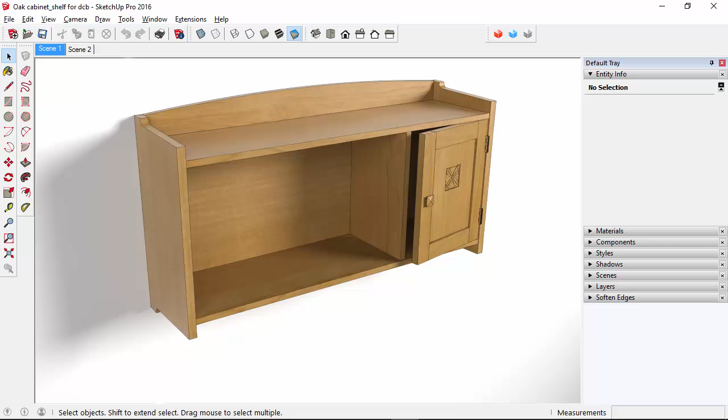There are a couple of ways to do this. I'll show the method I showed him. I think it is the easiest, and it helps you keep everything straight. For this video, I'm going to demonstrate this process using the door on this wall cabinet / shelf. Although I did originally draw the rails, stiles, and panel as separate components, I converted it to a single component for this example. I'll convert it back into the 5 separate parts. Then in the next video, I'll add the joinery to the parts.

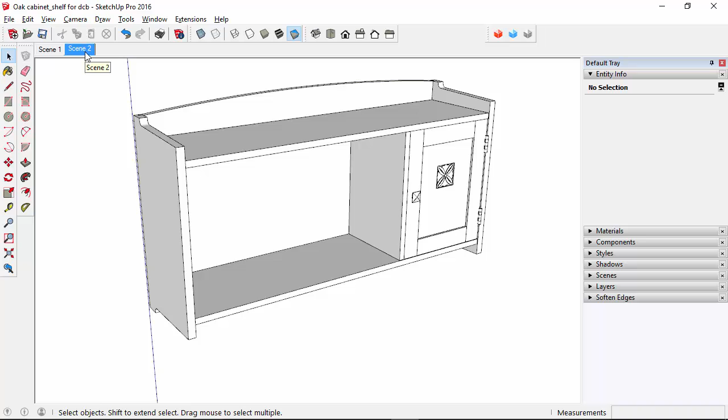Before I start editing the door, I'm going to take a moment to make a change in the model info. Under components, I'm going to tick the box for hiding the rest of the model. I don't normally work this way, but for this particular application I'll turn that on. That's a scene-specific setting, by the way, so if you wanted that to remain active after you change scenes, you would need to update the scene when you've made that change.

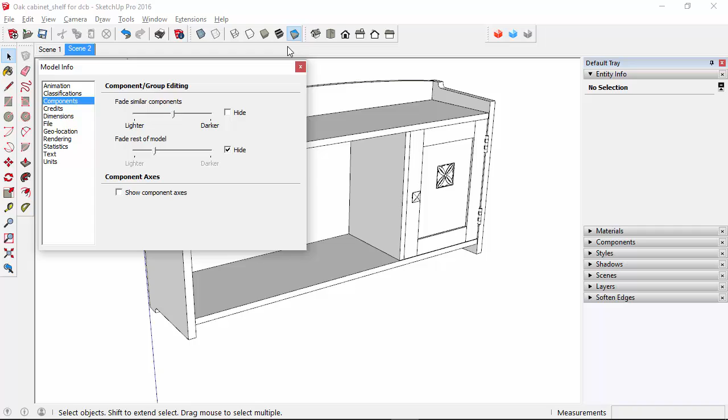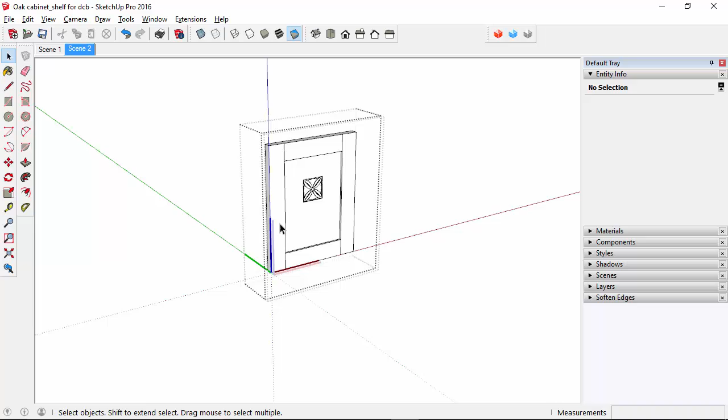Alright, so I'm going to open the door for editing. The door currently consists of the door component and the knob, which I did leave separate. So I'm going to open the door for editing, and now it's time to move on with creating these separate components. I did draw in lines to identify the ends of the rails, show that separation. If you were going to leave the door as a single component instead of its 5 separate parts, adding those lines is helpful if you apply materials, because you can get the materials to orient correctly then in just the areas where you want them.

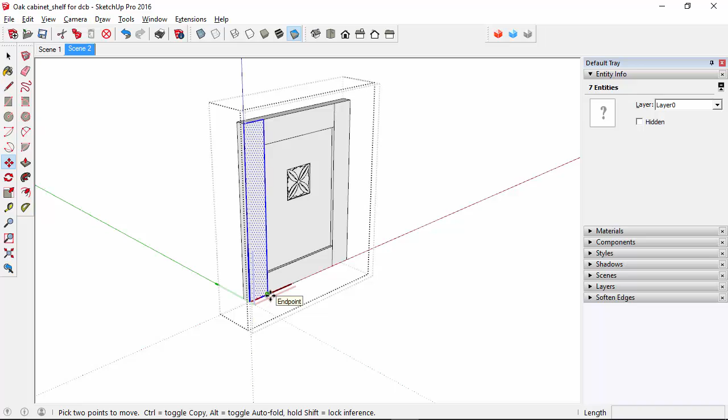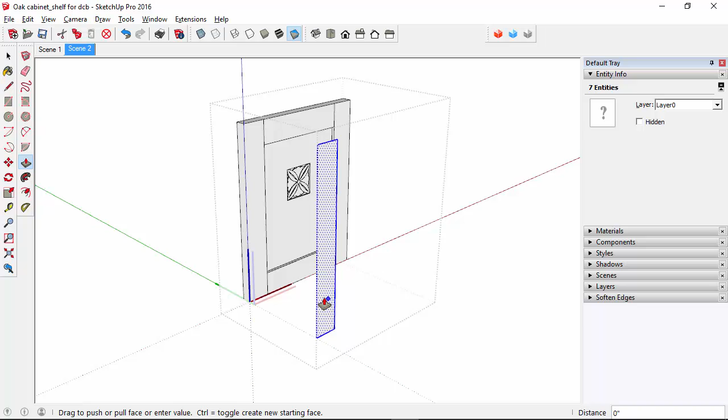And for no particular reason, I'm going to just start with this left-hand stile, and I've selected it by double-clicking on it, and then I'm going to copy that out in front using the Move tool, and we'll go about 6 inches. That distance isn't critical, but it's something that I can remember long enough to get this all done. Now I'll use push-pull and give this some thickness.

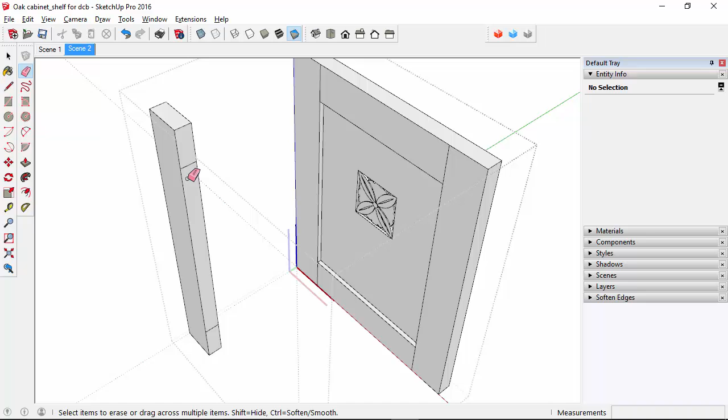One thing to note, the intersections between the edges of the rails and the edge of the stile break that vertical line, and so you get little horizontal lines there when you extrude that to make it 3D. So we'll just get rid of those because we won't want those later. And then triple click and hit G to make a component, and then we'll create the stile component.

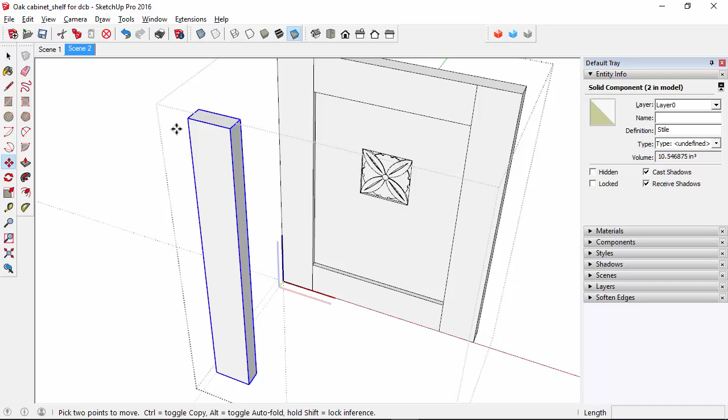And I'm going to go ahead and copy this over to make the one on the right by holding the Shift key, or in this case I could use the right cursor key to lock the move direction. I was able to then use the existing door as a reference to get this stile in the right place without having to know the measurements.

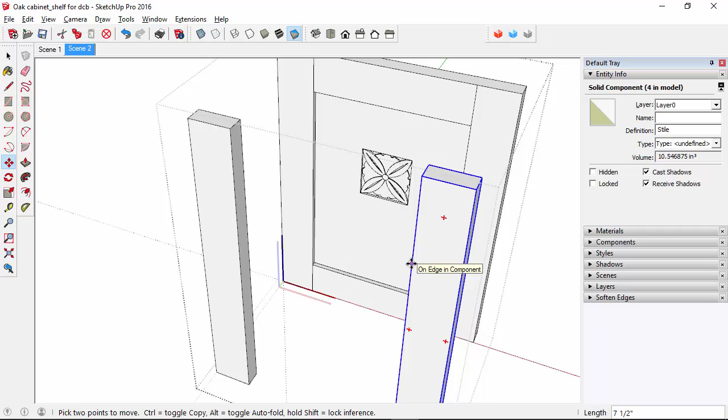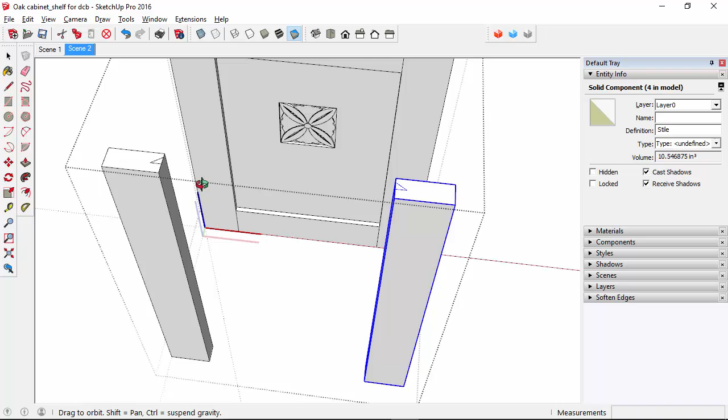Just to show you this, I'm going to add a little mark here temporarily. And actually, let's change that. Let me make that go this way. Alright, so you can see both of these stiles, being instances of the same component, have the same alignment. So I'm going to flip this along the red direction to make a mirrored image. Normally I wouldn't put the mark on there for myself because I can keep track of that, but I just wanted to show you that from the beginning.

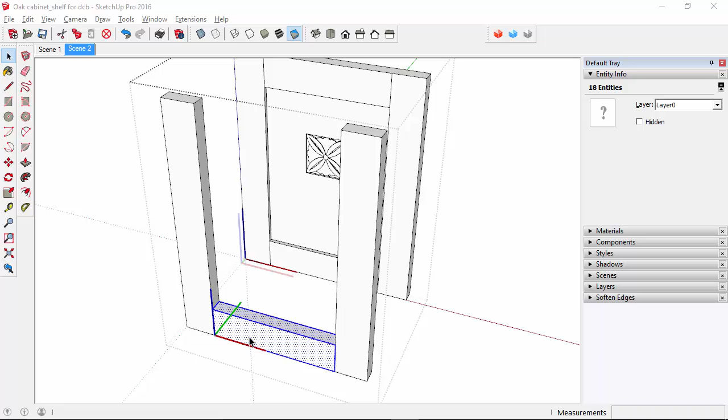Now I will repeat the process for the bottom rail. So I just copy that out. This time I was able to use the stile components as a reference, and push-pull, double-click just takes care of that quickly. Make that a component, call it a rail, and we'll use the Move tool and we'll copy that up to the top, and I'm going to use a keyboard shortcut to flip that, so it won't look any different at this point, but it will be different.

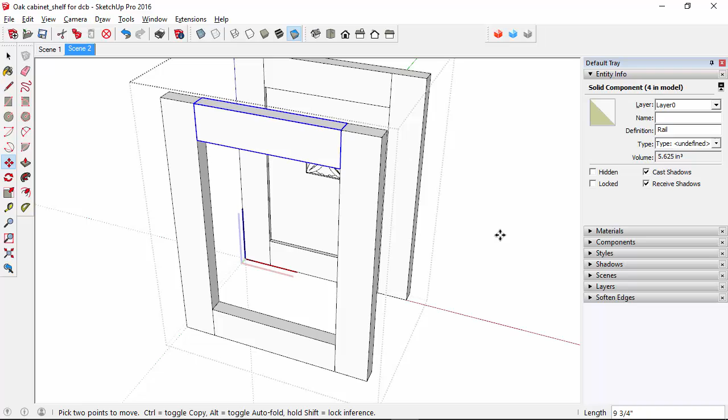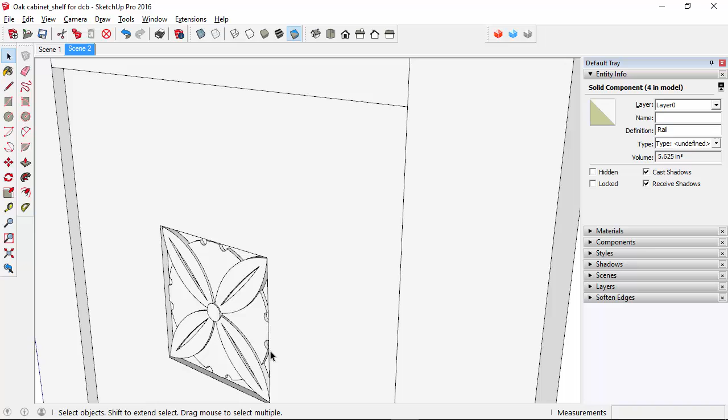Now all we have left is the panel, and what I'm going to do here is, thinking ahead a little bit, I'm going to create the back of the panel now. Because of the carving on the front, using push-pull to create the 3D panel would be a little problematic, and it's easier, I think, to do this. So I'm going to use offset, and I'm going to come in here. Now I didn't look at the dimension and don't remember how far in I had to go. So by switching to X-ray mode, I can just use the panel on the front to get that distance.

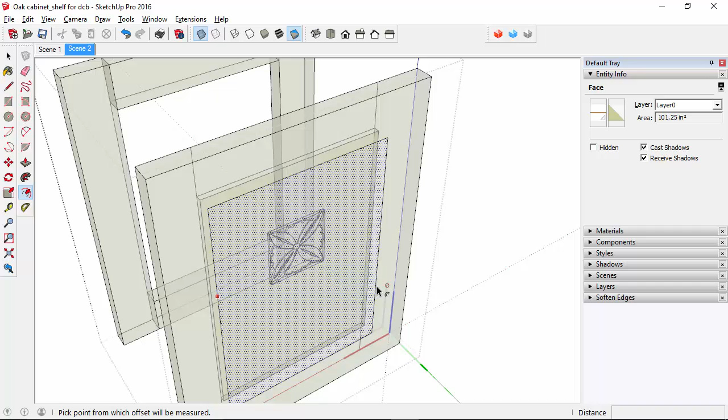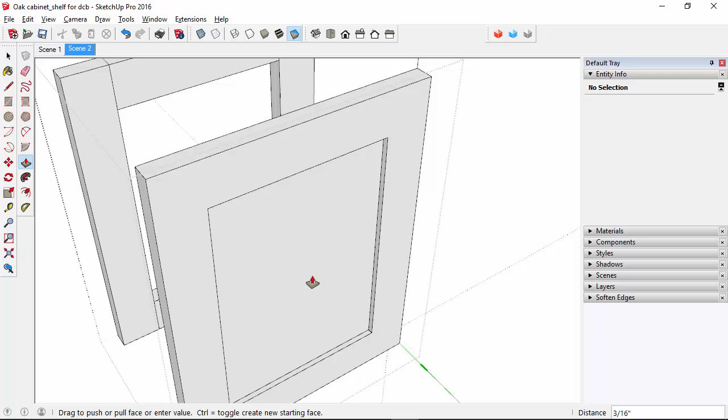Had I been smart, I would have looked at or measured that distance in the first place, but I can just use that as a reference. And then I'm going to use push-pull, and I'm going to push that in 3/16 of an inch. That'll give me a 1/4 inch thick panel when I get done. I did check that. So now I'm going to delete the rest of the door because we don't need all that stuff.

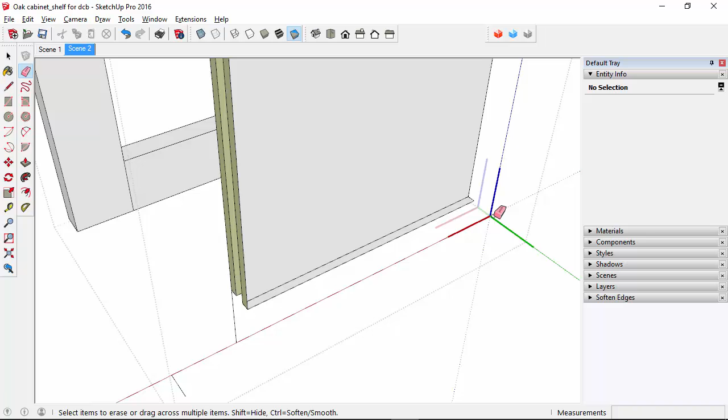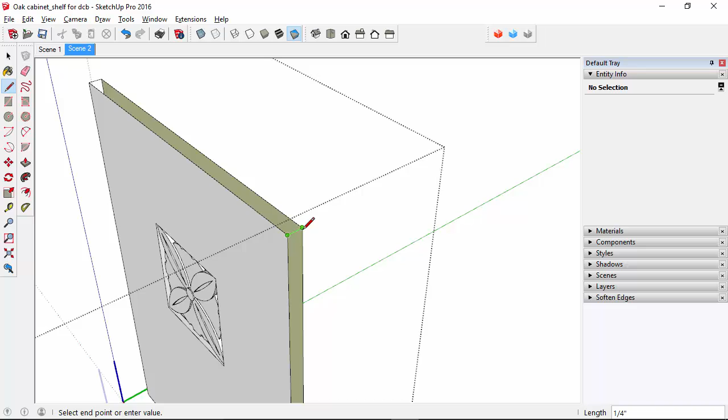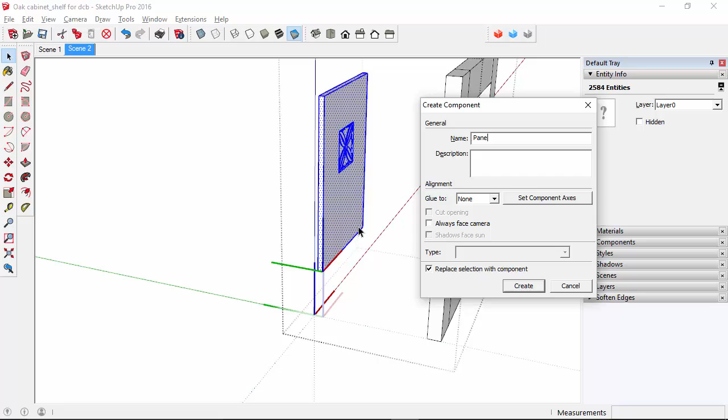And basically I'm going to leave the panel where I made it, or where it was to start with. And so there's just a little bit of cleanup, not a big deal. But we do want to get rid of all of those lines. And then I'm going to disconnect the corners, and I see I've got a line there I need to get rid of, and maybe one over here. Nope. Okay. So now I've selected the panel, and I will create a component out of that.

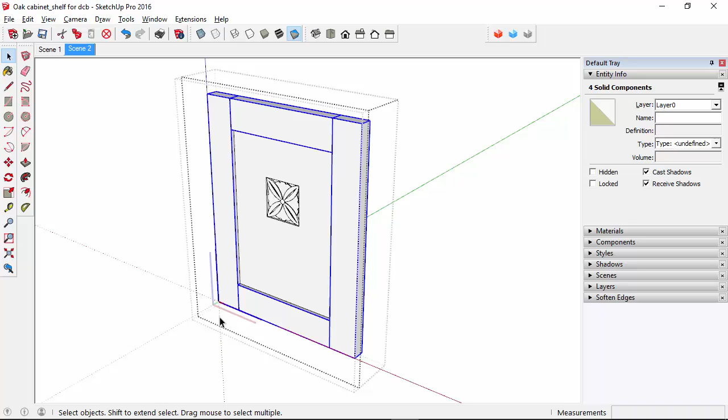Now these parts get moved back 6 inches. There's why I wanted to remember the distance. And I've got what looks like the door again, but again it's 5 separate components. So in the next video I will add the joinery and the mortises for the hinges, but hopefully this gives you an idea of how to convert something from one single mass into component parts.